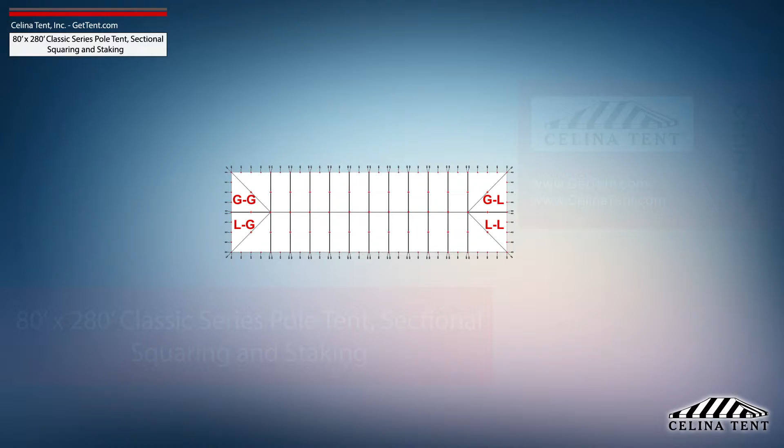This video covers squaring and 5-foot staking applicable to a sectional 80-foot by 280-foot Classic Series pole tent from Celina Tent. 5-foot staking is standard for tents with an eave height of 7 or 8 feet, and would need to be adjusted for eave heights other than this standard.

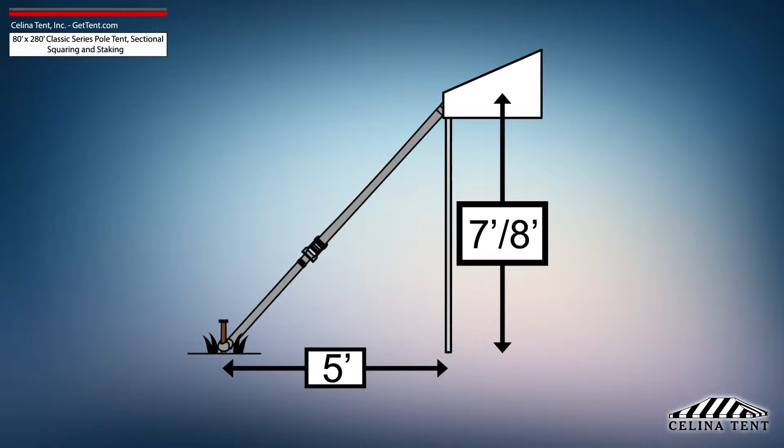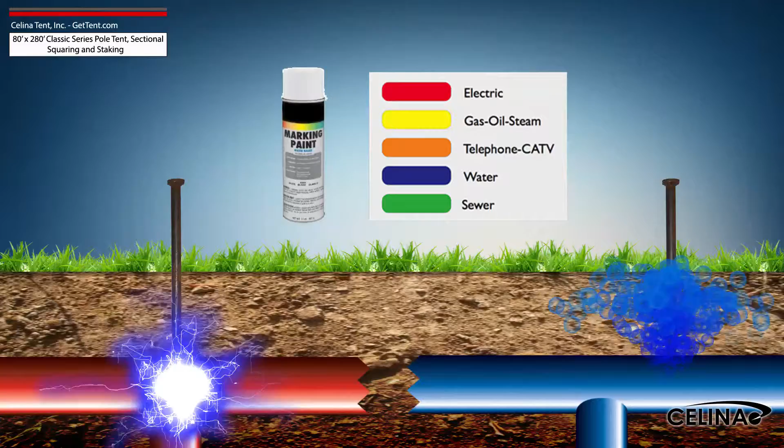Tent squaring allows the installer to accurately place all tent hardware and install tent stakes prior to beginning setup, and helps them avoid any marked underground utilities. Utilities must be marked by your state's local utility services prior to any tent installation.

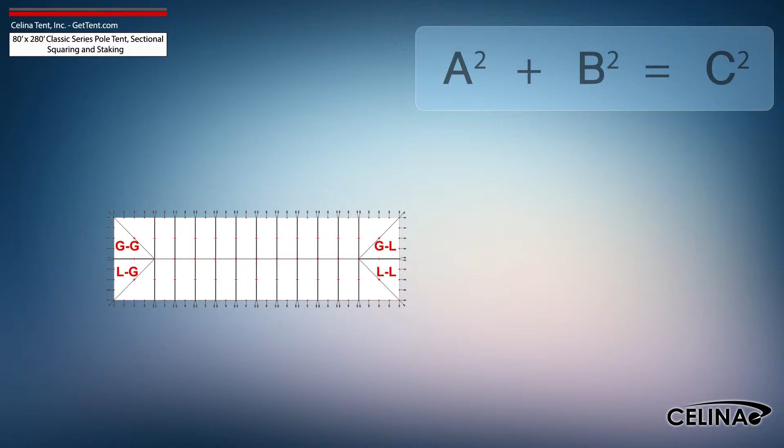Using the Pythagorean theorem and adjusting out for 5-foot staking, the entire tent footprint will be 90 foot by 290 foot, with a 303 foot 7-inch diagonal length.

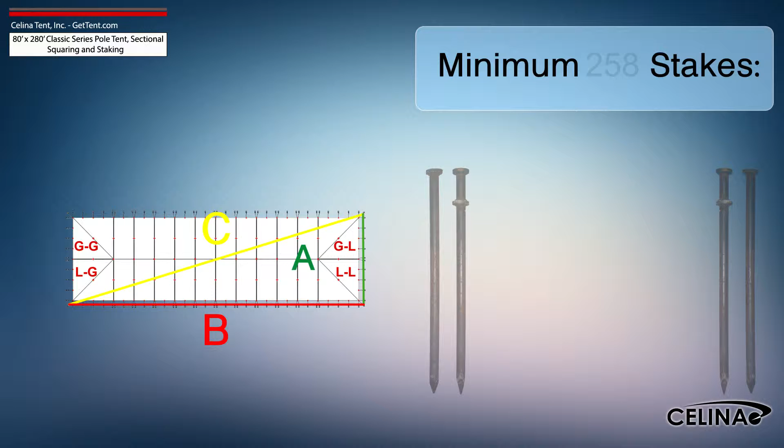Celina recommends that an 80 foot by 280 foot Classic Series pole tent receives a minimum of 258 stakes: 6 stakes and 3 stake plates for each corner pole, 2 stakes and 1 stake plate for each side pole, 4 stakes and 2 stake plates for each side pole at lace line locations, 1 stake for each quarter pole, and 2 stakes for each center pole.

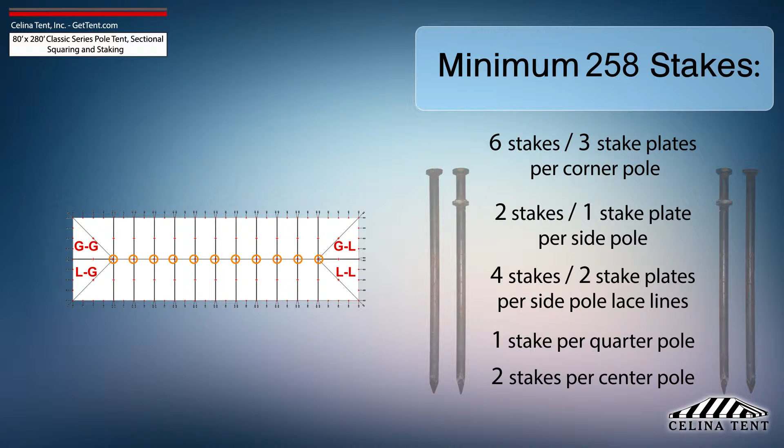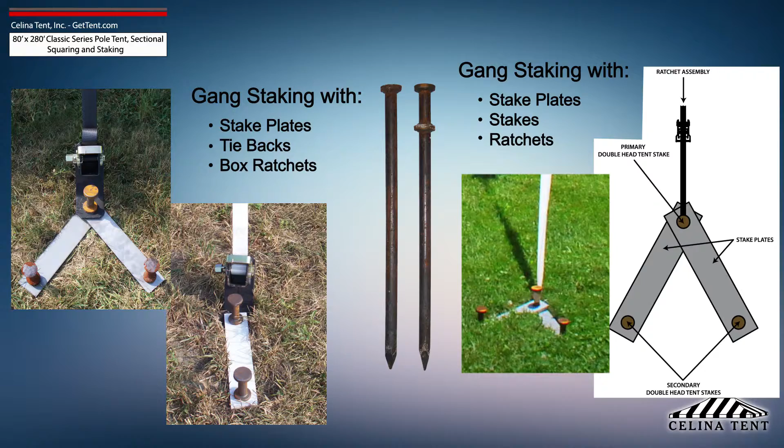This amount of stakes provides the minimum amount of security for a pole tent of this size. Additional staking is required for any site that doesn't meet optimal soil conditions. Tent staking is the most important safety procedure during tent installation.

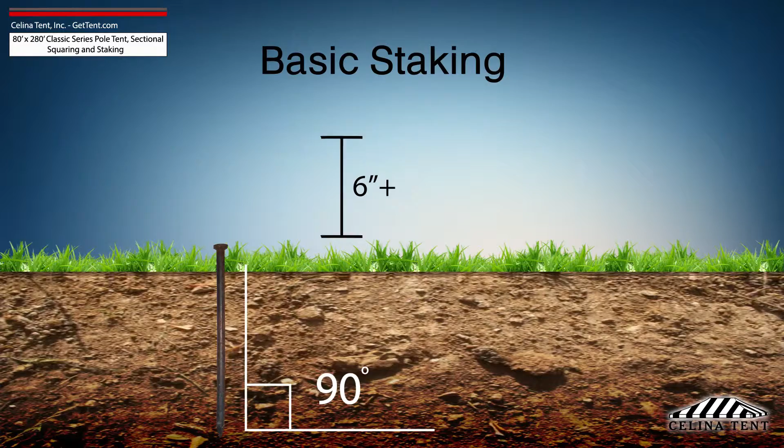Tent stakes should be driven vertically so that the stake is as close to the ground as possible with space to tie on a strap. Any length of stake protruding from the ground that is more than 6 inches will have detrimental effects on the holding power of the stake. Attach the ratchet strap or rope as close to the ground as possible to reduce strain on the stake.

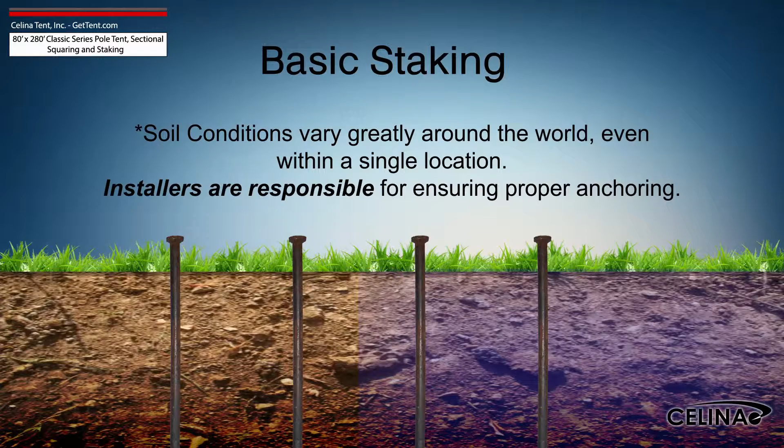It is the installer's duty to inspect the soil conditions and possible weather effects for the duration of the tent installation. For water-saturated or loose soil, more tent stakes are required to achieve adequate anchoring. Staking may be increased using dual stakes and a staking plate, or gang staking utilizing 2 staking plates and 3 stakes.